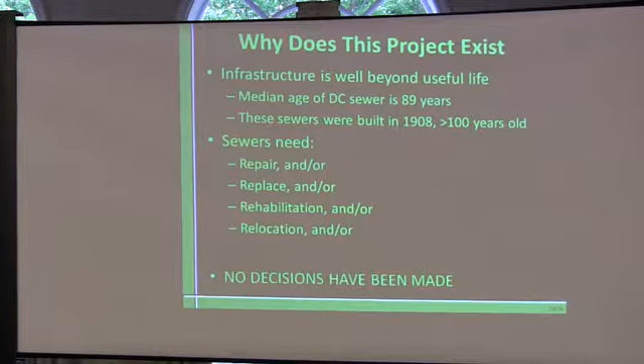And to reiterate, John said it, Jody said it — no decisions have been made. We're here collecting comments. We're going to go through a series of concepts and options that we have, just the universe of engineering possibilities, and we want to hear comments on those different concepts.

We want to hear your comments, concerns, and questions about those concepts. Purpose of the meeting: we'll give you background, purpose, and need, talk about the concepts and issues related to some of those concepts, and then in the second half, we really want to focus on hearing your questions, comments, and concerns. So the outline of the presentation will focus on three things: overview, purpose and need, and then concepts.

The first two will be rather short. First, overview. I think everybody's probably familiar with the location, but it is Glover Park and Soapstone Park.

The pictures we'll be showing in the presentation tonight are all from Soapstone, since this was at the request of 3F, but the project concerns, issues, problems and needs are all very similar for both parks. In Glover Park, the sewer line runs right down the center of the park, close to the stream, from Van Ness all the way down to Foxhall. In Soapstone, it runs basically from Albemarle, just east of Connecticut, along the stream all the way to Broad Branch.

Existing conditions - what you see here is not a sewer line, it's a park. Personal opinion, it's quite a beautiful park. That's the existing condition.

Work we've completed to date: CCTV, it's a fascinating kind of thing. It's a remote control robot that we can send into the pipes with a camera. It can pan, it can tilt, it can do all kinds of things, and we can look at all the defects remotely inside the pipe. Most of you probably haven't seen the inside of a sewer - we'll fix that tonight.

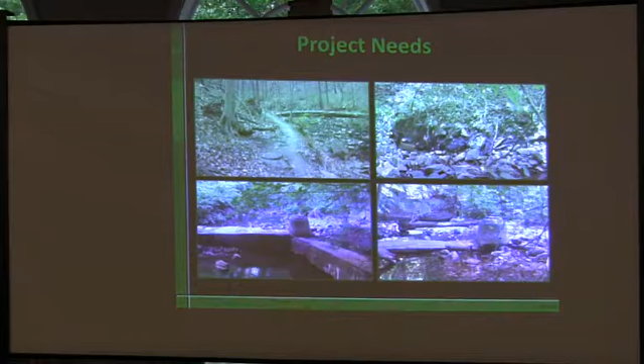Scooting down here, that bar of concrete is a sanitary sewer pipe. There's a manhole, another manhole. This one is particularly interesting - that shadow right there is looking underneath the pipe. There is nothing underneath that pipe holding it in place. The only reason it's there is because there's a manhole here and a manhole adjacent to it, and it's just spanning that distance. We need to fix that before it fails.

Here's my favorite pictures from inside the sewer. The pipe's broken, it's got holes. There it is leaking. And this one, it's tilted, so the water flowing is obviously in the bottom of the pipe, but the camera's tilted, so it looks a little sideways. What you see right there is a crack running along at about 11 o'clock on the pipe.

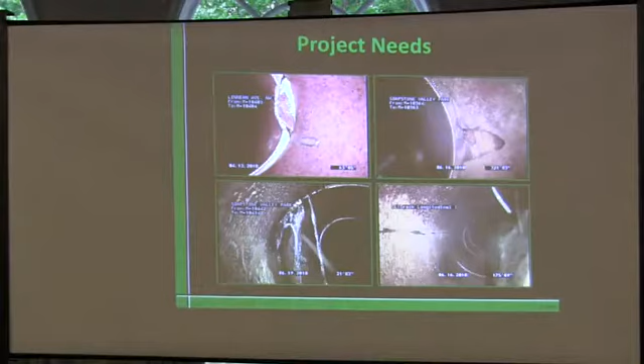Oh, sure. I'm going to pull this over because I have my... Onto the concepts. Is it okay if I keep going?

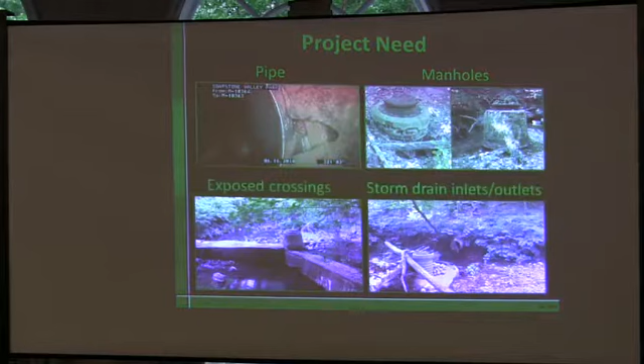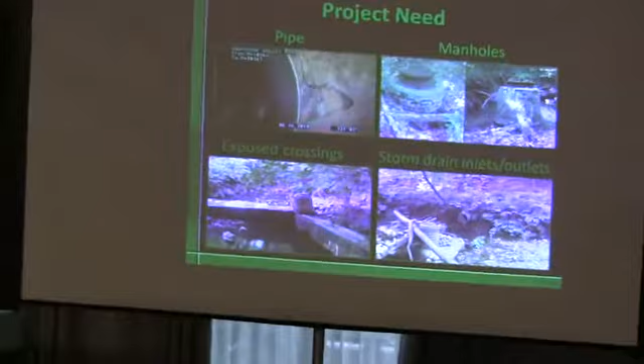The project need—one of the very first things we have to do in engineering is define the problem before we can define the solution.

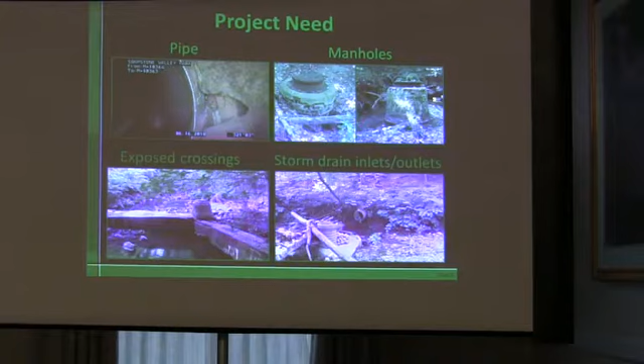All the problems in these parks really fall into 4 asset categories: pipes, manholes, exposed pipes, and storm drain inlets and outlets. It just so happens that the top 2, pipes and manholes, have very similar solutions, and the bottom 2 also have very similar solutions. So we'll talk about pipes and manholes first, and at the end we'll have a couple slides on concepts for repairing exposed pipes and storm drain inlets and outlets.

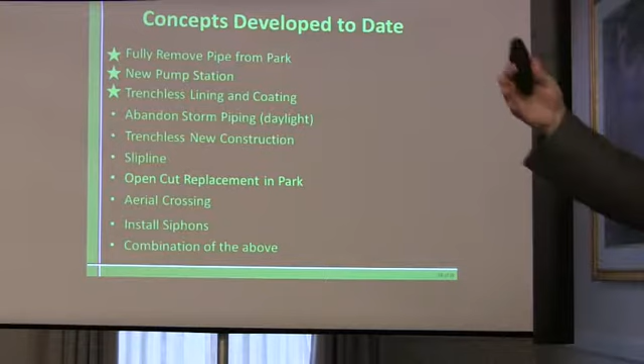Abandoned storm drain piping—that one is not being talked about tonight, really primarily because it focuses more on Glover from Massachusetts south. As far as soapstone goes, there's the open stream already, and there's not a parallel storm drain running down, so it really doesn't affect ANC 3F. But the gist of that alternative is there's an existing storm drain pipe and an existing sanitary pipe and an open stream. Well, we don't really need a storm drain pipe if we have a stream.

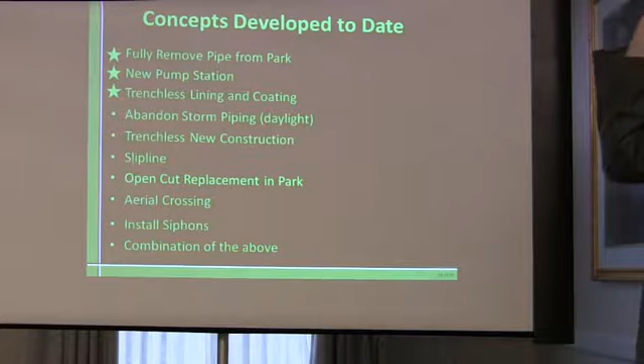It ends up proving to be not very feasible, or I should say at least very impactful, because with the volume of flow that comes down, it would be very erosive. And in order for that stream to convey flow, we would really have to rebuild the entire stream, which would disturb a significant number of trees—which we won't be talking about later actually, but when you get the EA, it'll be thoroughly described in that.

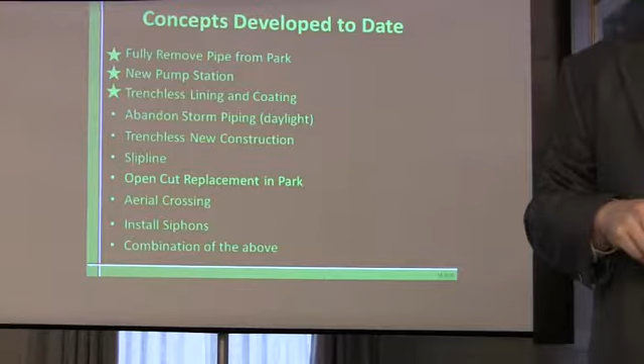So another one we won't be talking about tonight is trenchless new construction and slip lining. The only reason is the impacts from this third one are very, very similar. Trenchless new construction is microtunneling, PTMT, auger boring. These are basically—if you follow the news—like the Lady Bird Tunnel that is currently drilling up the Potomac and will be going up the Anacostia. It's a very similar technology, just on a smaller scale, obviously. It's a tunnel that's drilling underneath the ground.

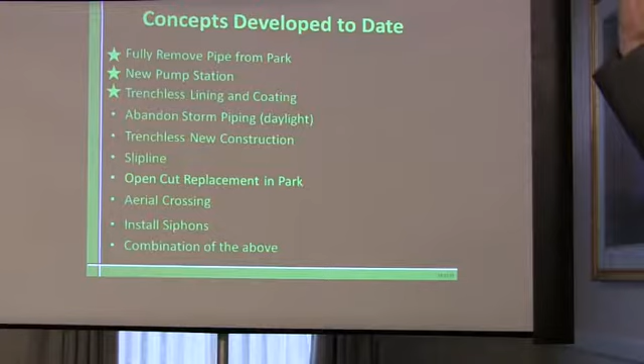Slip lining is just where we take the old pipe and we take a smaller pipe and we just slip it through. The problem with that one is the pipe is a certain size for a reason, and the new pipe would not have as much capacity.

Open cut replacement in the park—this is where we would go in with a full-size track hoe, dig a giant hole. It's 40 or 50 feet wide, and it would be a disaster. Nobody wants that. I know Nick doesn't want it. We don't want it. So we're not going to spend any time talking about that tonight.

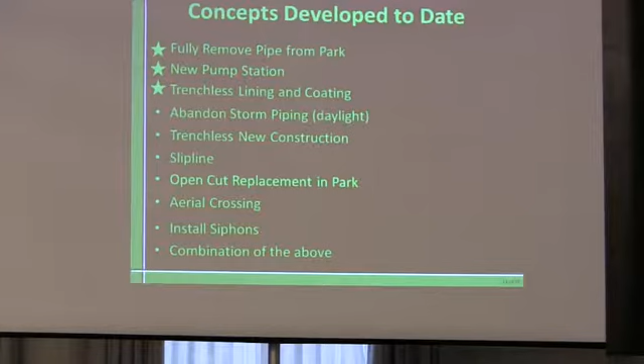Oh, whoops. Aerial crossings and siphons are really just a method—something that comes up at various points in time.

I'm going to set the microphone down. Maybe I do need the mic stand.

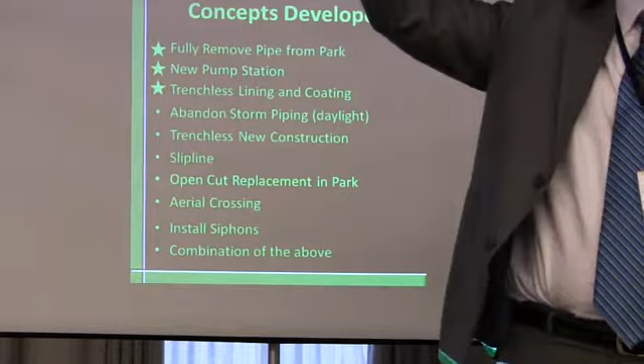If you've got a road here and a stream here, and this road has a sewer in it, and you've got a road over here that has another sewer in it, and those two need to be connected, you either have to go under the stream or cross over the top of it. An aerial crossing allows us to cross over the top of it.

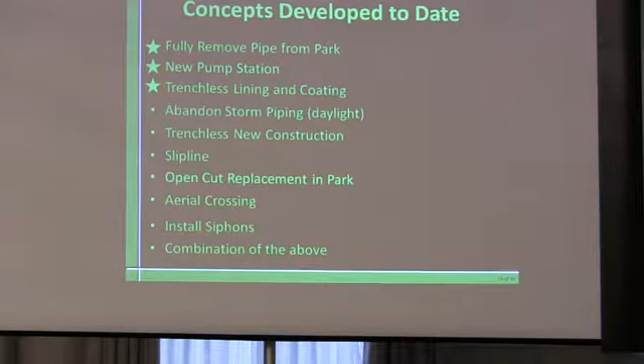Installing siphons works just like the P-trap under your sink. If you can imagine, for those of you who have had to clean out the P-trap on your sink, that's clean water. This is not. We don't like these, they clog very quickly. They do work, we do have them, but none where they would work on either Glover or Soapstone have enough flow to keep everything moving.

And then, of course, a combination of all the above. So first, I'll hit each of those three with the stars. First, fully removing the pipe from the park.

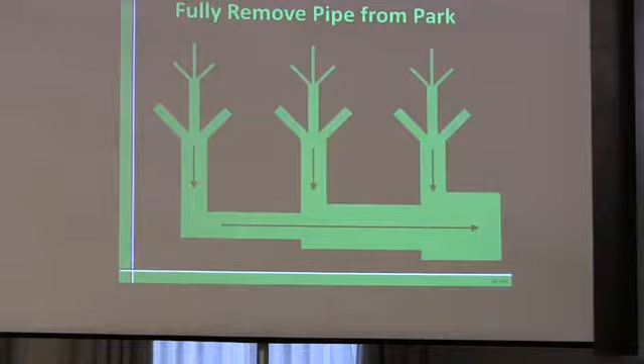Imagine you're looking down from a helicopter, and instead of seeing streets, you've got X-ray vision and can see down through to the pipes. This is a schematic, so to speak. For Glover Park, for example, imagine that this is Nebraska and this is Wisconsin, and that's the pipe flowing down Glover Park.

In Soapstone's case, this would be the one running down Soapstone, and this would be a kind of a combination of Connecticut and everything on the south side. This would be a combination of Albemarle and Audubon Terrace, for example. So we've got flow coming from all these houses, and each one of these lines has, for example, a house, or 10 houses, or a retail, anything on it that produces wastewater, sewer that gets into the system.

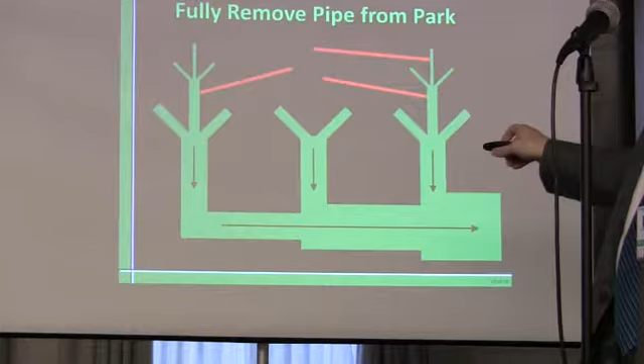In order to remove that line from the park, we have to reroute it. Well, that one no longer has flow in it. The tributary sewers coming into it, they have to be rerouted. That one doesn't have any more in it now. The next ones, they have to be rerouted out, and so on. And that's how we get rid of the pipe in the park.

This, of course, necessitates potentially upsizing pipes outside of the park. The biggest single problem with this is water flows downhill, of course. So the homes that are closest to the park drain into a sewer that is, on average, 10, 12, or 15 feet deep. If we do this without a pump station, we'll get to pump stations in a minute, but without a pump station, that's flowing by gravity, and they get very deep very quickly.

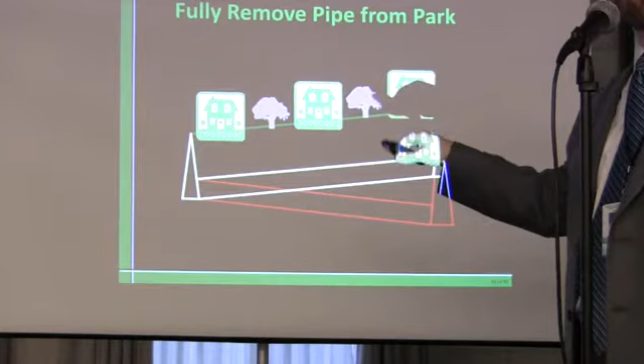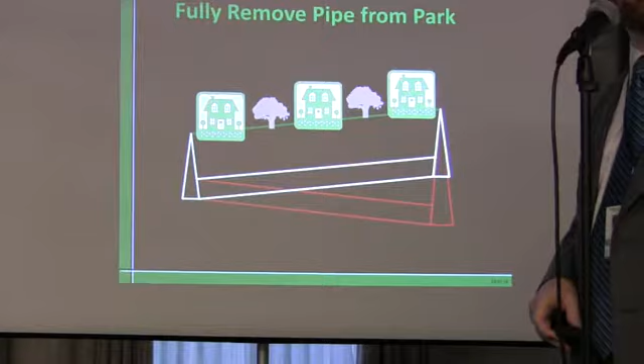For this project, we're talking on the order of 80 feet. The maximums are 80 feet. Several of these would end up at 40, 50, 60 feet deep. To give you a scale, most sewers are 12 or 15 feet deep. 20 is a common maximum. Imagine digging a 20-foot deep hole in Connecticut Avenue as a way of thinking about it.

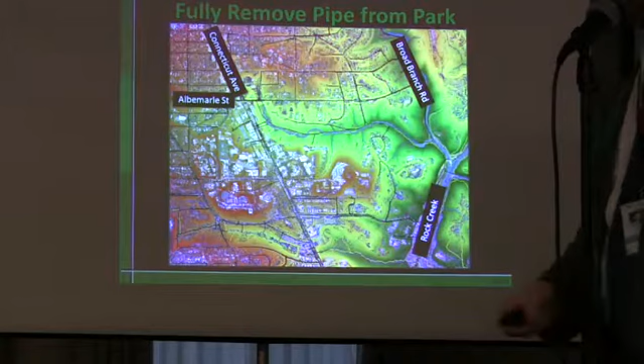For example, this apartment complex, or building I should say, I don't know if it's apartments or condos, but it's got a sewer line coming down. If we were to reroute that out, it would have to come out that driveway, and by the time it's going uphill, by the time it gets to that high point, that one is one of the worst ones. That's about 80 feet deep without a pump station. So I'll get to pump stations in a minute.

So the primary issues with fully removing the pipe from the park by gravity are excessive depth, up to 80 feet in locations. 23 tributary sewers have the same problems, that's Glover and Soapstone combined, Soapstone alone has 4 of them. And then road closures - we would impact Foxhall, probably the easternmost lane, from MacArthur to Canal. Probably a closure, it's not really work you can shut off during rush hour. Closer to home, at least for 3F, Connecticut and Albemarle would have a significant intersection impact.

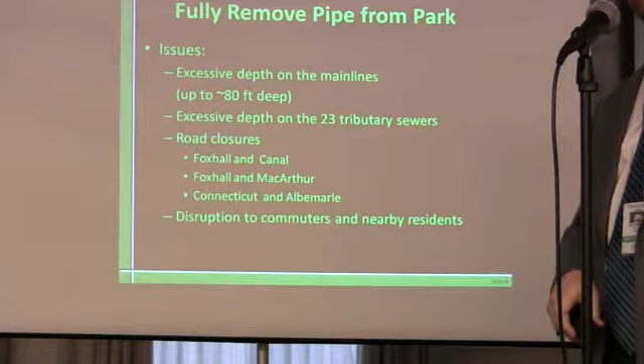So you're mixing the two projects. I am. Couldn't you just... I think it'd be better if I can do that.

The road closures, are all 3 of them for Soapstone or only the last? Only the last one, yep.

Sure, that's... I might slip on that, so maybe help me a little bit.

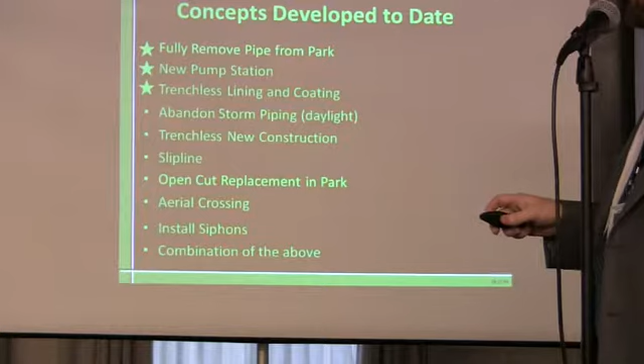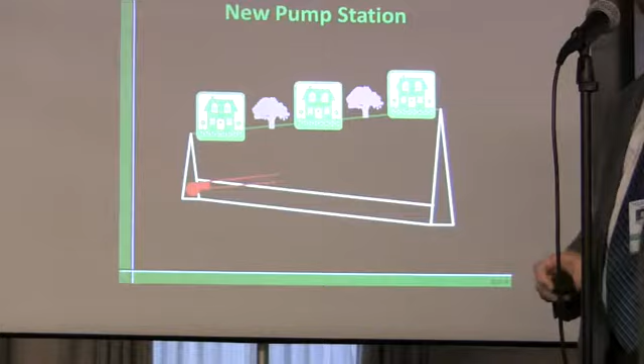So on to a new pump station. I was describing how the sewer's flowing the wrong direction and it just gets real deep real quick. We can always just push it up the hill using a pump station.

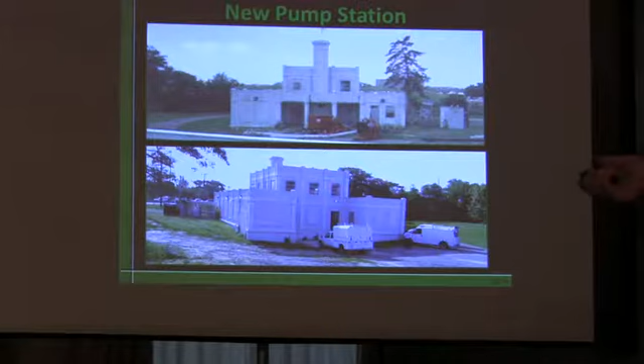For the flows on these projects, it would require a full-size pump station, one mainline pump station, and then several smaller ones. To give you an idea of what this pump station would look like when it's finished, it would take up a quarter acre or so. It's going to have a building that's a couple thousand square feet, generators, electrical equipment, maintenance crews coming in and going, and it's always going to have some construction equipment, some bypass.

Oh, and vents, right.

This would be a new pump station. So if you look at Soapstone, where you put pump stations, they've got to be close to the sewer line. It's a building, so it's got to be on a relatively flat piece of land that is a quarter acre or so for the final product, but we also need another quarter acre or so just to build it. There's no quarter acre lots around here, so it's a problem.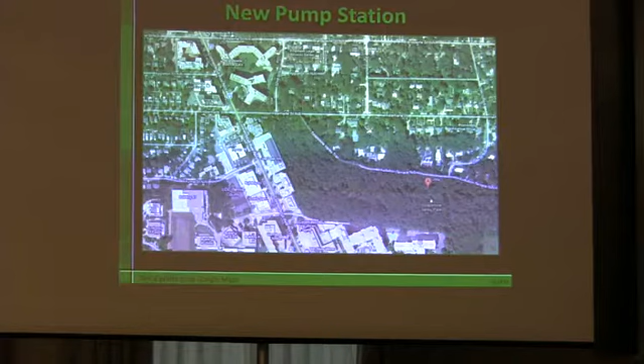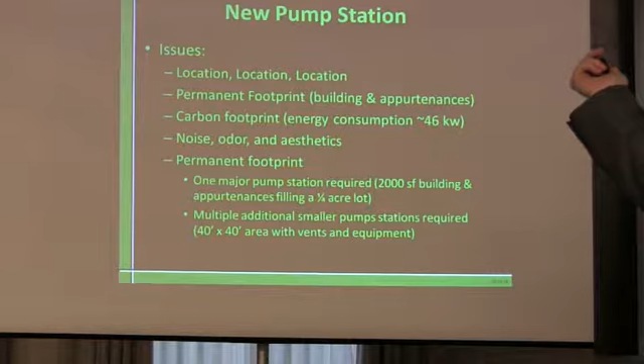So issues with pump stations: location, location, location, the permanent footprint, the carbon footprint. This pump runs on electricity, so it would use 46 kilowatts, which is equivalent to a small mid-sized sedan at highway speeds, 24 hours a day, 7 days a week, into perpetuity. So there's a carbon footprint to consider. The number one complaint we'll get from you all would be noise and odors. Aesthetics will be a distant third, but it's always third.

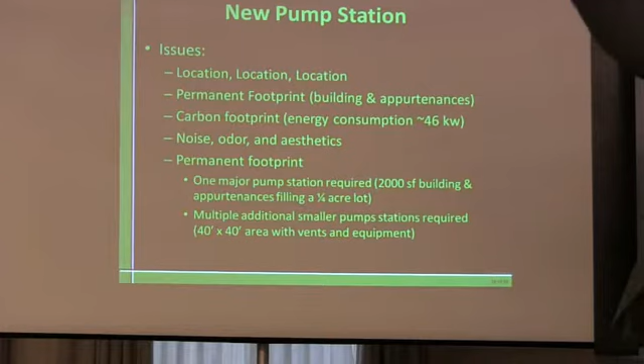And then the permanent footprint, which we talked about a bit. The smaller pump stations really only need a 40 by 40 footprint, permanent. There's another 40 by 40 again on the side for temporary construction. Vents, equipment, there's going to be a storage shed looking thing for electrical equipment, and a 30-foot deep wet well that's going to collect all the flow, and the pumps will be in the bottom of that, and they'll kick on a couple times a day and pump everything out.

Well, yeah, there's about 20 feeder lines, so each one would need one. Along in this area, no. What's that?

Oh well, there's backup generators on site. So there would be a concrete pad, and there would be a generator sitting on that concrete pad. The size of that is going to be kind of the size of one of those new Fiats or a smart car, about that size. Yeah, absolutely, it's a diesel generator.

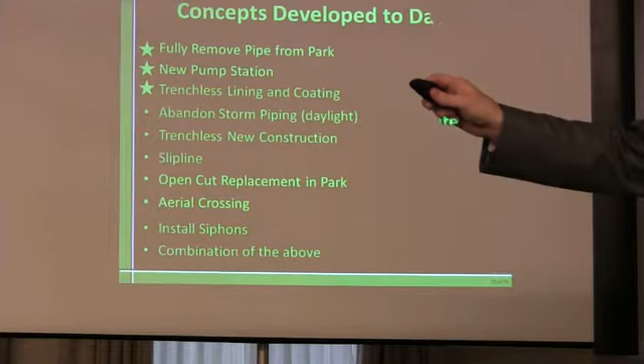4. That's correct. I'm sorry, what? What's that?

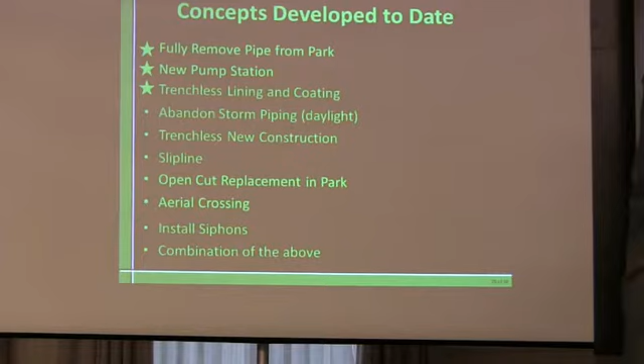Well, actually, we'll get that to the end. Right now everything works by gravity, so everything's going into pipes that all flow downhill and eventually collect the same place the streams collect.

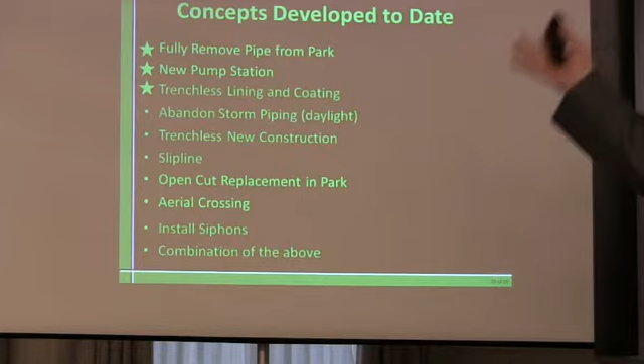Well, it's all we're running through the different concepts. So if you don't like the pump station, that's why we're here, to be honest, to hear feedback on the different concepts. It's this list right here.

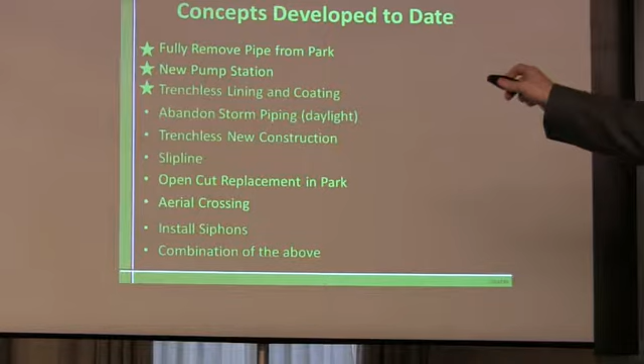Thank you. Trenchless lining and coating. So I've got another handy dandy visual display here.

I'm sorry, I've moved to this, this is the starting of the third one now. The first one was fully removing the pipe from the park via excavation. The second one was focusing on fully removing the pipe from the park via pump stations. This is a third one, leaving it in its current place and rehabilitating it using this really cool stuff that I'm about to show you.

Is it okay if I move on?

Was removing pipes and not installing anything. Well, we'd be installing new pipes. New pipes, yep. The second one is installing new pipes and new pump stations.

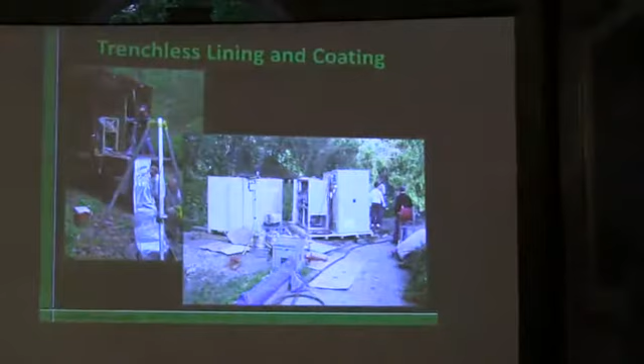One of the things we've done is this usually requires a corridor of about 20 feet wide. It's got trucks ranging in size from large dump trucks to the biggest U-Haul you can rent, which have to drive along and up to each manhole. We've talked to specialty contractors, there's two of them out there with slightly different technologies that can fit into a smaller space.

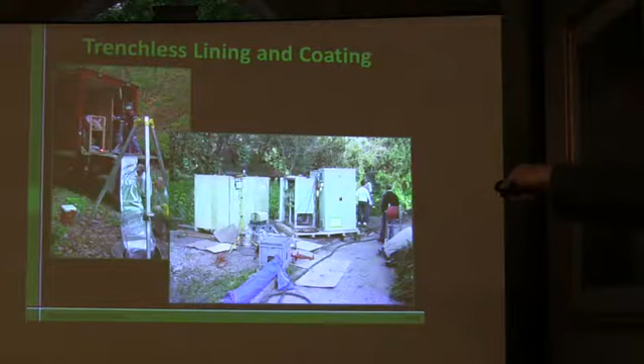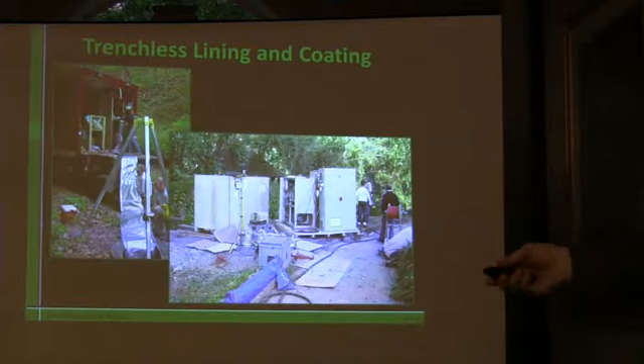You see those pallets in there. This contractor has built their technology in a way that it can be picked up on bobcats and smaller equipment and maneuvered in. So the manhole is actually back behind here, and you can see that footprint is much smaller than a traditional U-Haul plus a garbage truck.

Something we have to pay attention to, especially with the trees, is vertical clearance. We do need vertical clearance, so even if we're close to a large tree, we have to pay attention to overhanging branches.

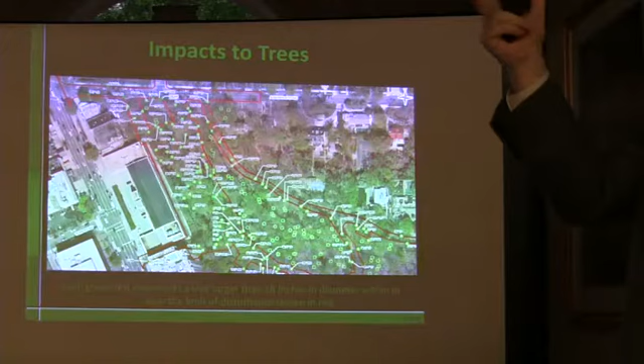The single biggest comment we've been getting is trees, trees, trees, and more trees. So I put this figure in here, it requires a little explaining. This is Albemarle, there's Connecticut, the trailhead is right over here. Everything inside this red is what we've delineated as a limit of disturbance for alternatives. All those green dots are trees greater than 18 inches, and this is still a small percentage of the total number of trees inside that limit of disturbance.

Something very important to clarify: this is not a clear cut. We're not planning on ripping out 4,000 trees and just plowing them down. This is the number of trees within the limits of disturbance for all the different alternatives, and you can see there's a lot of green dots.

Absolutely. Very important point.

The impact of this one is not really about the technology. You're working from manhole to manhole internally, but it's the space you need around the manhole for the trucks, the curing, and so on. It's mainly getting to the manholes, creating the construction access to reach them. So again, we've drastically reduced this by meeting with every representative of companies out there to bring the smallest equipment in the industry to reach these manholes.

But still, it's taking advantage of what's there, taking advantage of gravity. We would structurally rehabilitate the existing pipe to like-new condition, but it still has a heck of an impact.

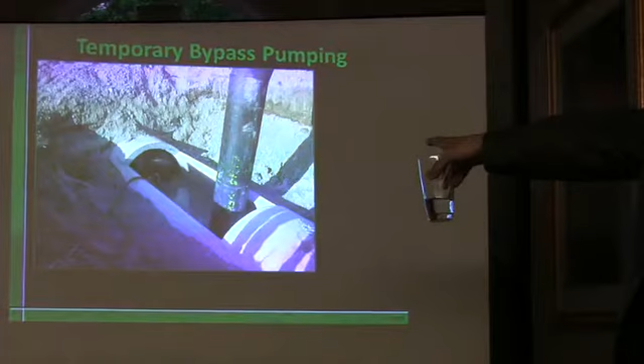So a few photos just to show kind of how that generally works. This is a bit bigger than what would be needed on this project, but it gets the point across. In this case, we cut into a pipe. In our case, we would be using a manhole. You can see here a plug in the end of the pipe. So flow is coming from here. It can no longer go down that pipe, so it's getting sucked up through that pump intake.

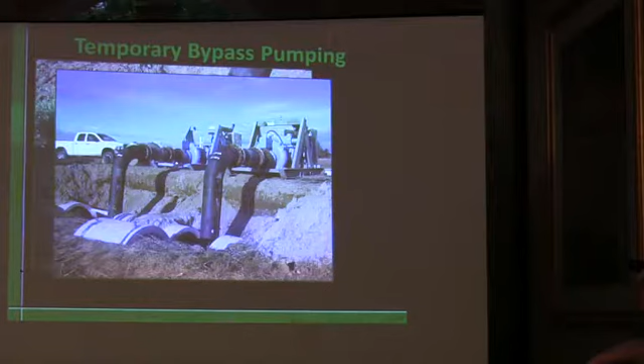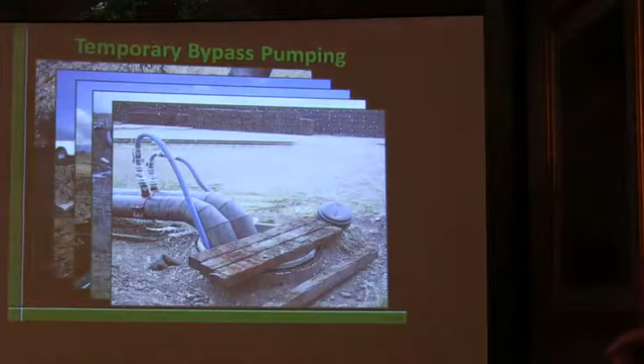There's a couple of pumps. We'd always have two for backup in case of failure. Usually the most common failure is running out of diesel fuel. They're manifolded, piped across wherever they need to be. You can see in this case we didn't have trees to worry about. And then it's dropped back into a manhole downstream of where they're working.

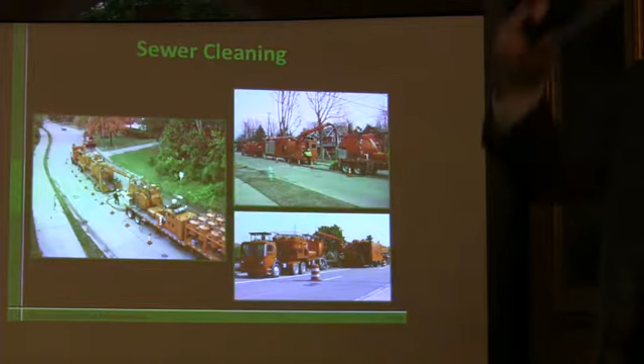Another impact related to trenchless lining and coating is if you imagine this pipe still having debris, rocks, other stuff sitting in the bottom of the pipe, that pipe is not going to inflate, it's not going to be circular. Instead of lasting decades like we need it to, it will last days or weeks. So the pipe has to be cleaned.

The way we normally do this is we use a big jet vac truck that has a reach of typically 600 feet. It can go 1,200 or 1,500, but it doesn't get the pipe quite as clean. This is, again, larger than a garbage truck, a little bit smaller than the largest U-Haul you can rent.

The pictures up here are a technology that we really like. They set this up, and they run water through the pipe, and they circulate it back, and they run it through again, and they get more and more water, and it goes faster and faster, and basically that water gets going so fast that it scours everything out, and that cleans the pipe from much greater distances. We can get up to 5,000, 6,000 feet in one shot. The problem with this technology is it's generally done in large diameters, 36-inch and greater.

We've talked to the contractors. We're pretty confident it can be done in our sizes. We think this can be done. It's definitely pushing the limits of the technology.

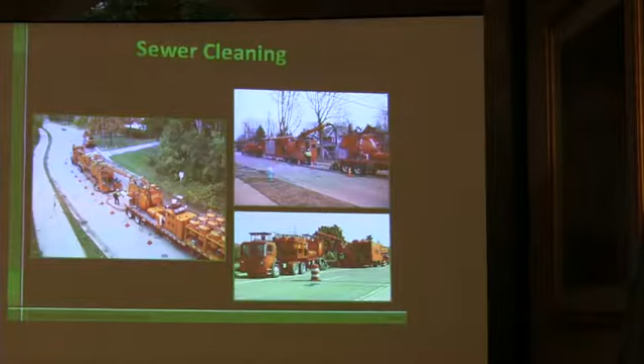So this would have to be parked in Albemarle. This would be parked on Broad Branch. It's got to be pretty close. That's a good question. It's going to be on the order of days, a week or two kind of thing.

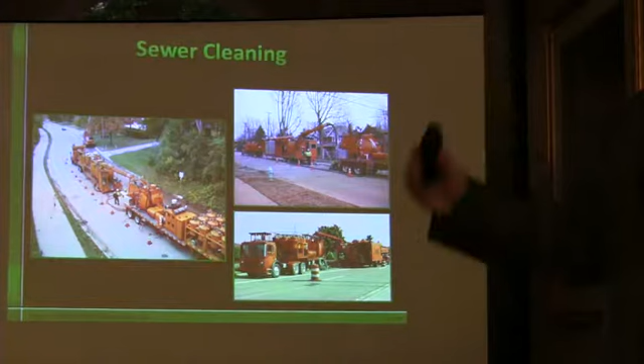No, the pipe would never be completely full anyway, so even if it is, it's only going to have 5 or 10 feet of head on it, and the pipes will withstand that pretty well. The more normal concern actually would be scouring, because you've got that grit and everything grinding along the edge of that pipe. These are clay pipes, and they won't scour. If it were concrete, we'd have a different issue.

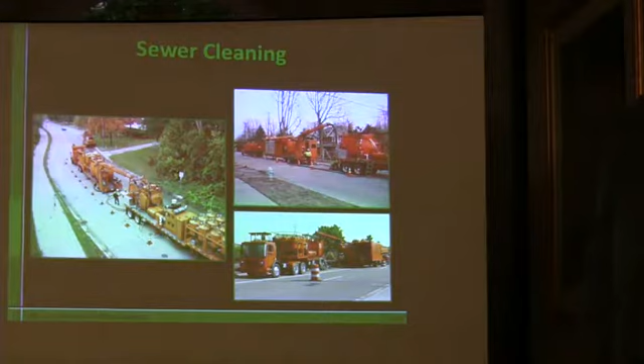So we're actually really close. So that is the different concepts for the pipes and manholes. Now onto the exposed pipe and the storm drain inlets, outlets. The list of concepts for those.

Obviously, we can relocate the pipe away from the stream, and it's no longer exposed in the stream. It would still be there. We'd have to abandon it. We'd have to figure that out. But the active one would no longer be in the stream.

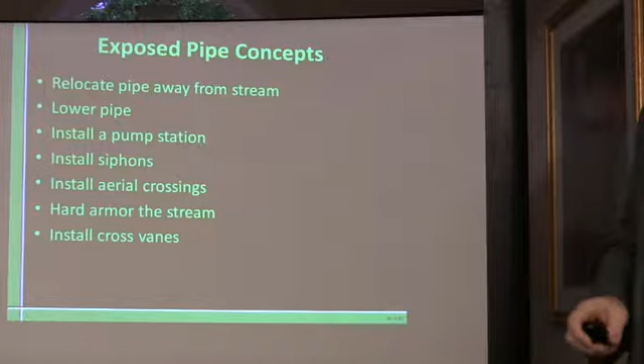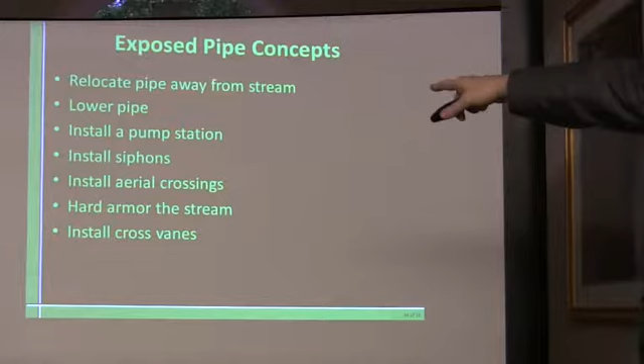Half a dozen: lowering the pipe, installing the pump station, installing siphons, and installing all the same things we've already talked about.

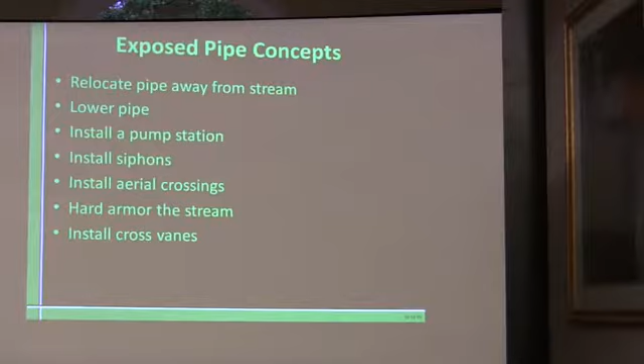Hard armoring the stream. When we talk about hard armoring, we're talking about riprap and concrete, not the most aesthetically pleasing. Installing cross vanes, I'll show you a photograph of that.

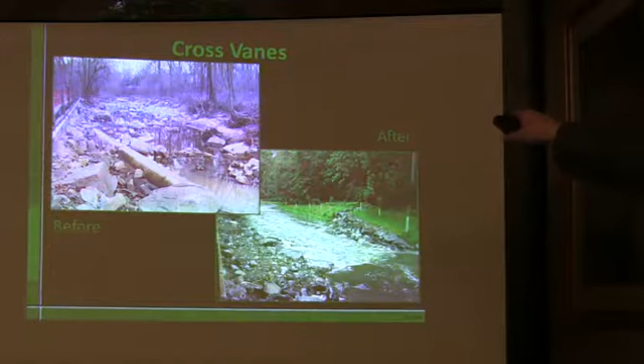Here we took these boulders and built a wall. This was a photo I took before I joined DC Water. You take a boulder wall, and it's dropping over this, and you see all that turbulence, all that white water. That's the energy dissipating, and it's dissipating in the center of the stream, so the stream isn't going to meander, and there's a large boulder underneath preventing it from eroding down. So all the erosion at this location is prevented.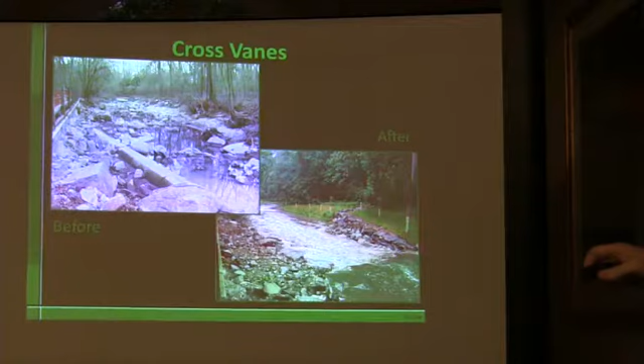That pipe runs back underneath here, so this is a good way of protecting pipes from erosion, down to the stream. We're talking 1-ton, 2-ton boulders for the bigger ones, I haven't got those yet. Here are a few other pictures of what they might look like. Worth noting, they can be designed for fish passage.

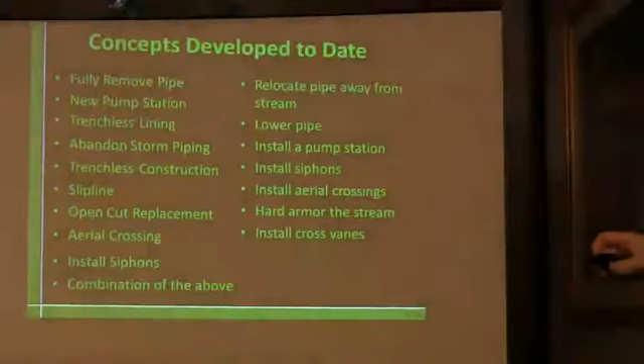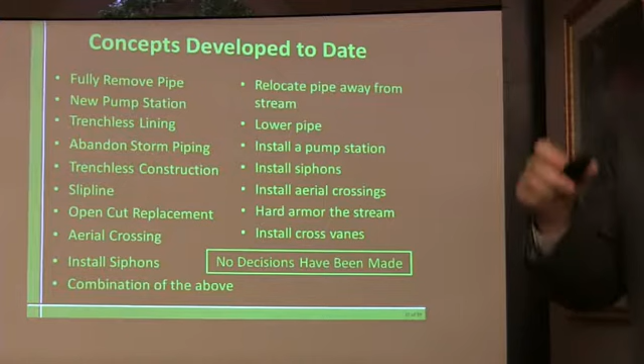The list of all the different concepts. Important to note, we've not yet made a decision. When will you? That's an excellent question. I think the answer is we're a long way off from it.

I do want to emphasize again that with closed circuit TV inspection, we have by and large internally inspected about 90% of these pipes. In our judgment, there are pipes that need to be rehabilitated. We can draw out the process, because we think those pipes still have a couple of years remaining in terms of internal condition until we're at the point of failure.

There's nothing that we have to run in right today and say stop the discharge. But on those manholes and those pipes that are exposed, at any moment, all you need is a tree to fall on the manhole, a tree to fall on the exposed pipe, not to mention other things. That could happen tonight.

It could. What's your optimal date to start this two year construction project? To start construction, the most optimistic date is about two years out. Part of that involves the timing of wanting to start in the right vegetative, migratory, and species time of the year. So public input we've received to date shows a lot of initial contact interest in a daylighting option.

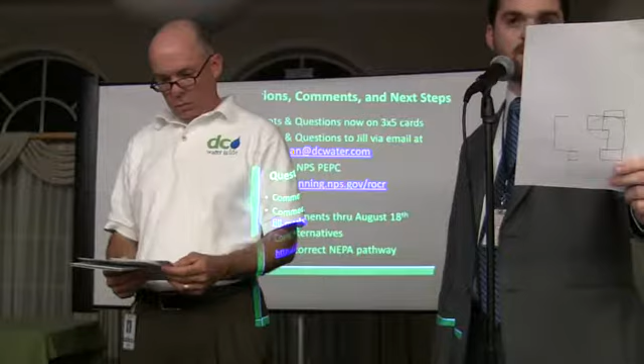There's a question about trees, the number of trees. What we have for Glover Archbold is a count within the limits of disturbance. This is multiple alternatives combined, and worst case scenario within the limits of disturbance -- which may or may not even be touched -- is 1,045.

Within Glover, I don't have handy the number for 6 inches and greater. I seem to recall that 4,000 is the right number. Correct. And then for Soapstone, the number of special trees, 18 inches and larger, is 194, and the number 6 inches and greater is 1,000.

So that's a lot of trees. But this isn't the number that are going to be cut. This is the number impacted in some way. Not even necessarily impacted, just within the area that we need to work. So a lot of those we can move around.

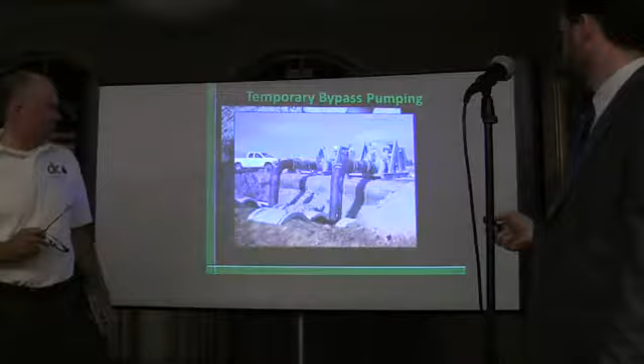That's an important point. Typically we would need quite a wide limit of disturbance for something like slip lining or cured-in-place lining. We're trying to narrow that access impact, and it'll be quite a challenge -- we're really pushing the envelope. But let's say we can do this within 10 feet.

Right now we're looking at the full distance so we could say what is the worst of that -- what are all the trees that could be impacted within the limits of disturbance. And what is the width that is preliminarily being used? What's the count with it? Yeah, the width -- how many?

14 feet? Okay, and we would work within something smaller than that. But we're trying to count the trees, speciate the trees, etc., within the full width that could be impacted, to get to the manhole.

And then within that width, we would consider the way to navigate to protect the resources to the degree that we could. Next question is about where the stormwater outfalls are.

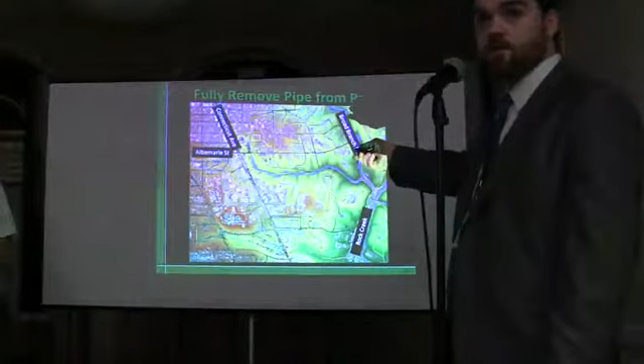We have a map of Soapstone. The black lines are the pipes. The big outfall is right there, there's a smaller one right there, there's the big one, the next one's right there. Number 3 is right there, that's draining off of 29th, that's a storm drain draining into the stream. And then the last one is coming down off of Lenore Lane. I don't know the neighborhood as well as you all, sorry.

Next question: will there be any improvement to the flow in the streams? It's eroding lots of trees within, when there is a storm. No.

I think the question's trying to say, would we be doing anything that would reduce the amount of flow coming down from the storm drain? Improve the flow in the stream itself, right? So nothing we're doing would change the flow in the stream. Who asked that question? Does that answer it?

Well, actually, I should clarify. Under that daylight concept, there is an option on our list where we would take either all—we couldn't take all—or some portion of flow from the storm drain and put it back in the stream. But that's Glover, and that's Glover only.

All right, let's get to a couple more. What about post-project roads? What is being considered along those lines? What footprint?

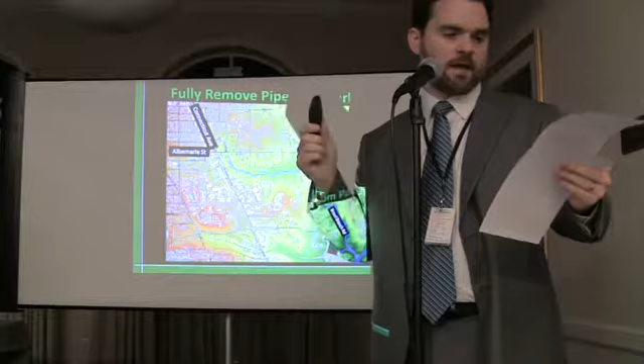Another question about maps. When we publish maps, we want to have alternatives that we can show you, and that will come out with the draft EA, including the location of the exposed pipes and the smokestack manholes.

Can a main sewer line or branch come off Connecticut Avenue between existing commercial buildings to make the sewer replacement in the park less in distance and less destructive? That's on the table that we're looking at. It's definitely something that we're evaluating.

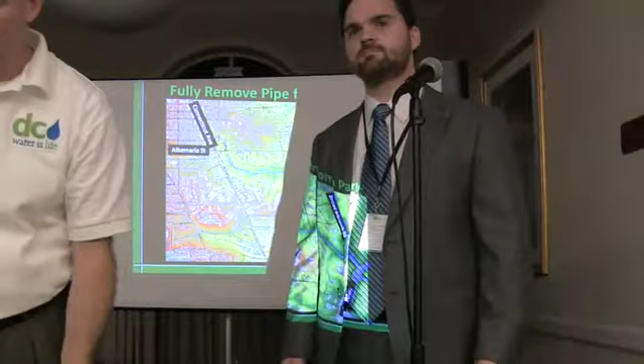Can I just interject something here? My name is John Gray, and I'm with the southern end of this park. Can you speak up a little, just a tad? And we don't need to go back to 1968 as far as the rest of the park and roads go, we only need to go back a couple of years. I was thinking the same thing, actually.

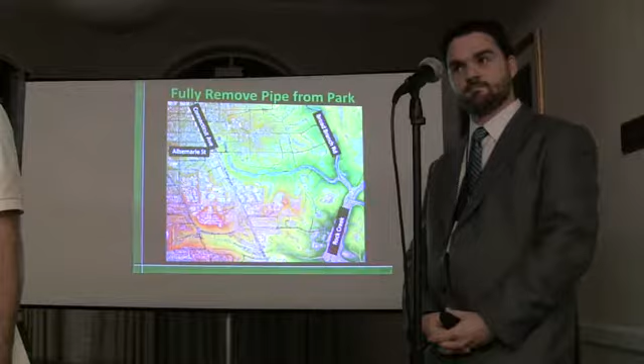Okay, so the park is under enormous threat. And Joe, is it? It's not the National Park Service's property, it's our property, it's a U.S. park. And the Park Service... so one reason I'm here is I'm very concerned about protecting that park. When Georgetown University proposed its campus plan, the Park Service did not do everything it could to protect the park. In fact, the opposite. So I think that's maybe what some people are here about.

And so it sounds like you're doing due diligence. I mean, it seems like a reasonable process that you're going forward with. But I think a lot of people are concerned about roads coming through the park. So there's a history here, a recent history you should be very cognizant of.

We appreciate that. We're going to cut off the comments. We got to most of them, but I know there's... How many overflows are occurring now? Well, sanitary sewer overflow, zero.

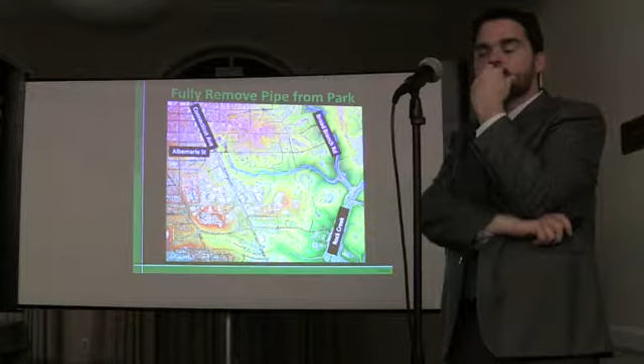Can I just make one request? Can we follow up with you afterwards, David? No, I'd like to make it, I'd like the community to hear it and you to hear it. It seems to me, for us as a community to intelligently deal with the issues that are bothering you, you should tell us, even if you don't give us the maps for 6 months, what houses and buildings producing this sanitary sewage are served by these 4 lines, and how much is flowing into each of the 4 lines from this collection of houses and buildings. Then we as a community can cope with these issues much more intelligently.

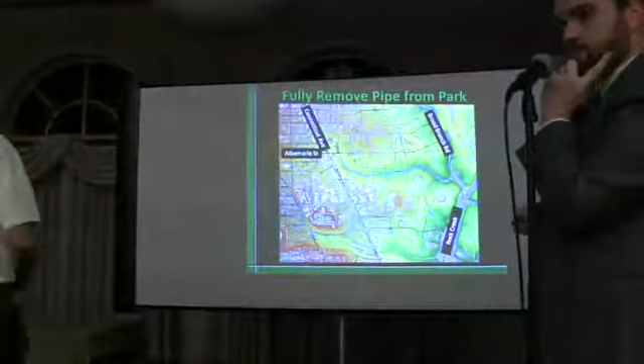So I can actually answer that on Soapstone, on this map. Everything inside this C, if you take this shape, everything inside that is draining down to Albemarle. That's not necessarily homes that would be directly impacted, but those are homes, apartments, condos, businesses inside this area that are draining into Soapstone. Glover Park, it's basically everything between Wisconsin and Nebraska. But you show Albemarle going all the way to Broad Branch. Isn't that the sewer? Well, that's the sewer line. There is a sewer line at the end of Albemarle that drops off the hill there and connects. We've got a large line in Broad Branch that connects into that, so those houses aren't going into Soapstone, they're going into Broad Branch.

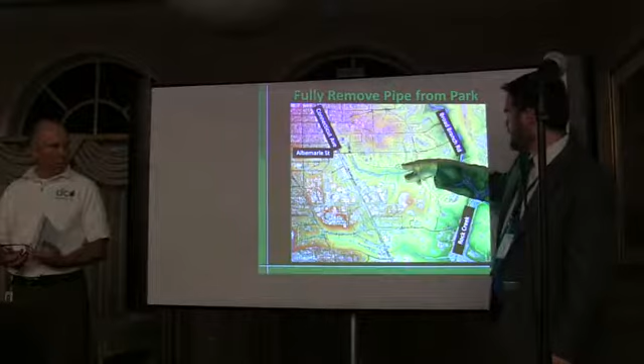Well, it's not the same C. There's a detail in here that you can't see. All these homes are draining into this line, which is coming down here, and this line is connecting these. Put it this way, if you want to do it by a map, do it by a map, if not by a list. But I think we need to know that, and we need to know how many gallons in each of the 4 lines that are bothering you, because maybe the answer is one thing for one of them and another thing for another. We can't comment unless we have the facts.